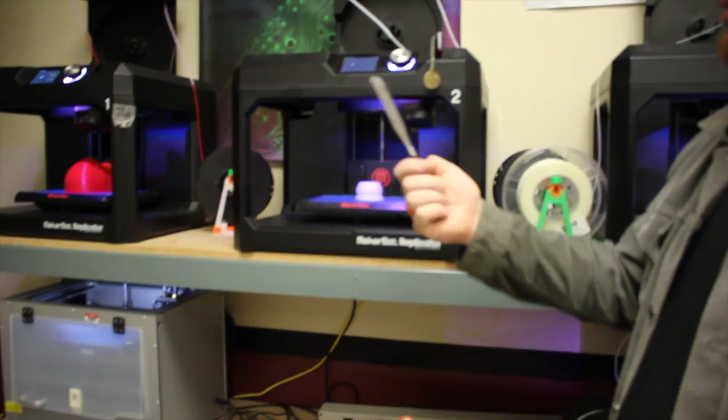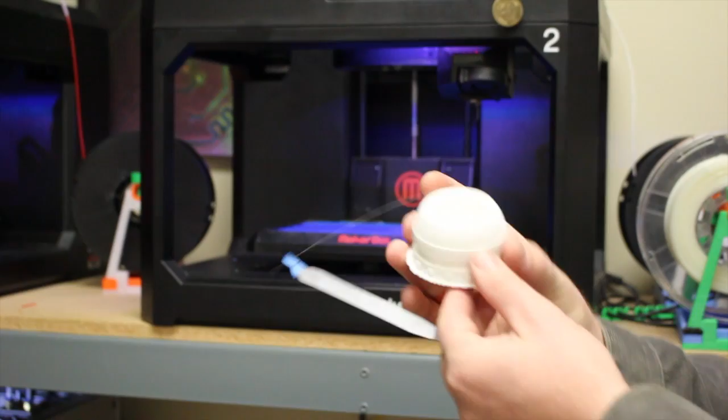Okay, so what we have here is a file that's already printed. We have to take our tool and remove it from the build plate, because the way it works is it sticks to the bed so it doesn't move around while it prints. If it moves around at all, it messes up the print, because the computer knows the points where it needs to go, but if it moves, it has no way of knowing that, so it just keeps printing.

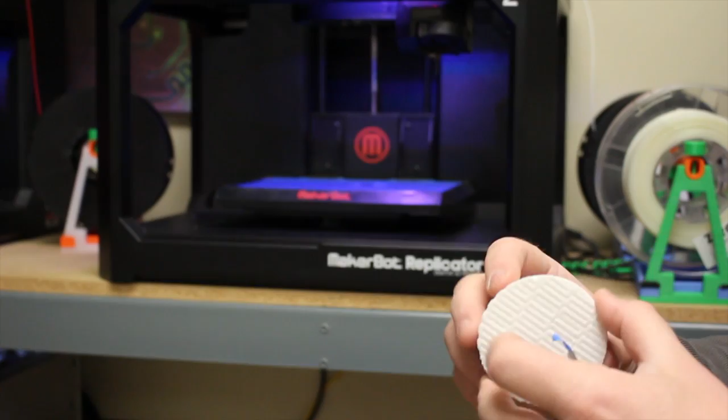So if it messes up, you get what we like to call spaghetti, which is just a bunch of filament that goes all over the place. Once we remove that, we're able to print another file.

So the way we do that is I have my file here on this USB drive, and we tell the printer that this one is finished and that we want to print another file from our USB storage. We have several things to choose from here that we scanned with our scanner.

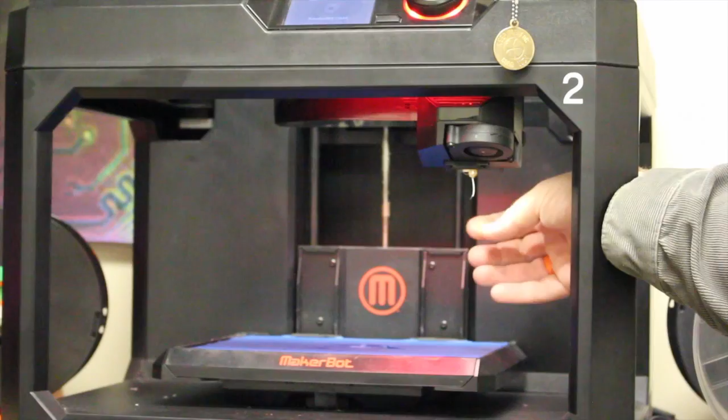Just like the hot glue gun heats up, we have to wait for this to heat up to the right temperature before it'll start printing. That way the computer knows where it's at and knows its position before it starts printing.

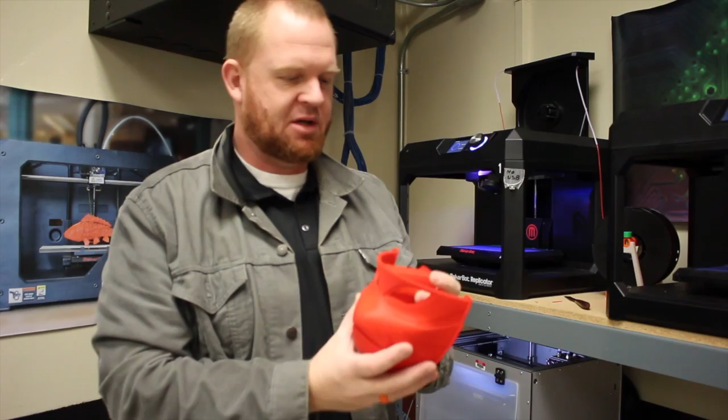Here's another example of a print that was printed out last night. You can see this is a mask, but it has this other material on it.

Now, if it's printing and there's nothing underneath it, it won't print out. It'll only print at so much of an angle before the filament starts to drop. So what you actually do is put material in that you don't need, just to hold the material that you want. On certain prints, we take the support material and just break it off, because you can see it's not solid—it's just there so your solid areas can print out without messing up.

So usually you go through a process where you rip out all of the support material, and then you can even sand this down, clean it up, and paint it so it looks really nice.

That was support material, but here, this is what we call a raft. Sometimes we do this to make sure it sticks to the plate while it's printing and doesn't move around, because this has less surface area—there's a possibility it could move while printing. So we do a bigger surface area on the plate so that it sticks.

And when we pull it off, we can just take this off and we have a nice clean piece. It makes it cleaner, and you can see it's kind of small for me, but you can do all kinds of cool things.

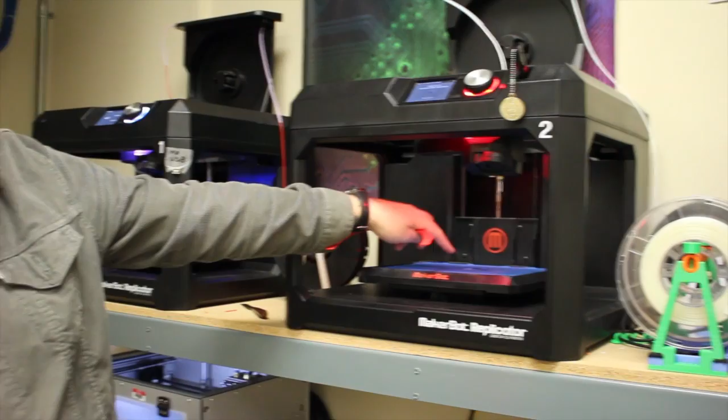Now this one's almost ready here. It's telling me it's moving into position. What it's going to do is go over here, and then the plate's going to rise up until it touches the nozzle. When it touches the nozzle, there's a sensor in there that tells it it's in the correct position.

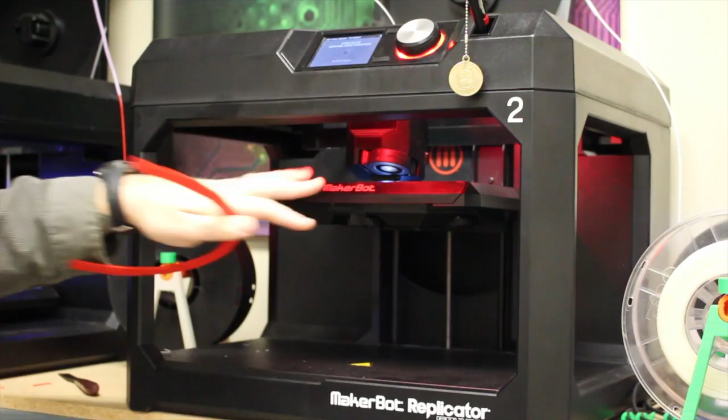So that's part of the process. It just says it's moving into position, so it's checking to see where the position's at—it's not actually printing yet. Once it knows where it's at and it's heated up to the correct temperature, then it'll start to print.

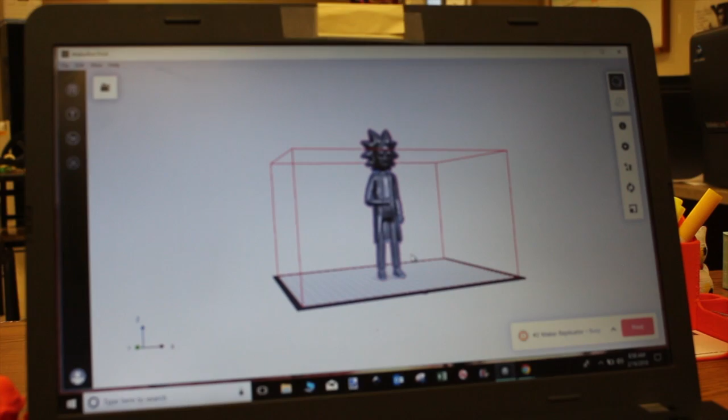So here's one of the software programs we use, and all the files need to be files that a 3D printer recognizes. This is one called an STL file, and it's Rick. Our software program is telling us he's too big for our bed because this is red.

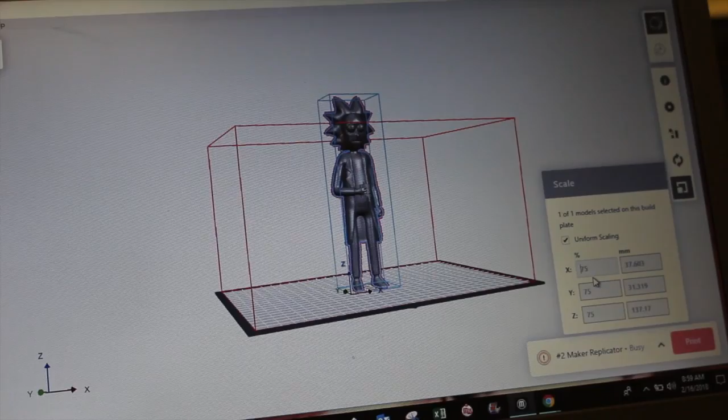So what we can do in this software program is adjust the settings and make them bigger or smaller, so we can print them out the size we want. So there we go, we shrink them down a little bit. I should have shrunk them more—there we go. Now we see the red marks have gone away, so now we know he's the correct size for the bed we're printing on.

Once we make all our adjustments and get everything the way we want it, we adjust our settings and then send it to the printer. We just hit print, choose what printer we want to print it out on, and send it to that printer.